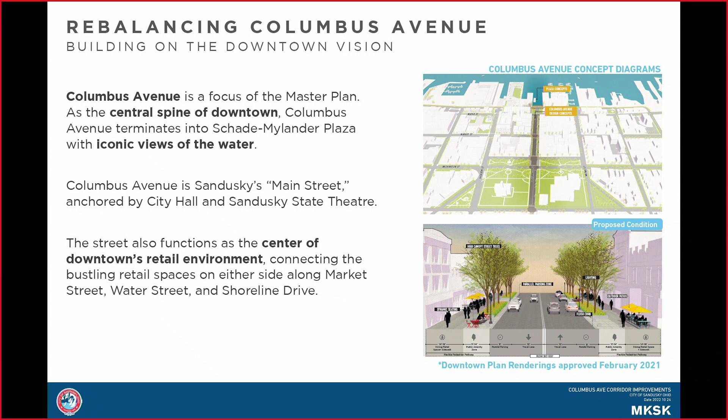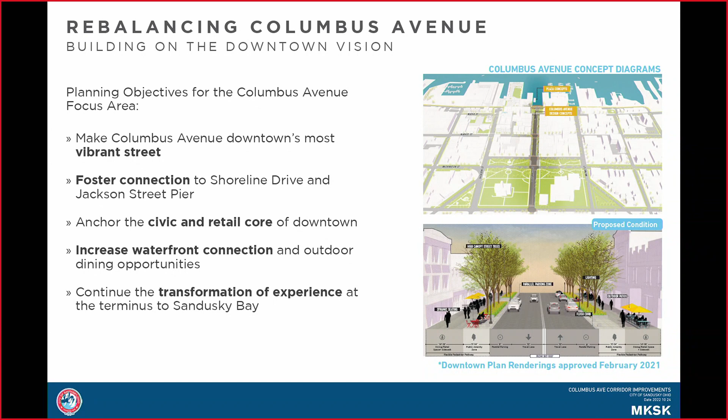We were tasked with planning objectives that built upon the vision for the downtown of really envisioning this as a vibrant downtown street, fostering connection to Shoreline Drive and Jackson Street Pier, anchoring those civic and retail establishments that I mentioned, increasing waterfront connection, and continuing that transformative experience of, as you're entering Sandusky, really taking in all of the elements that it has to offer.

We have been involved throughout, from the beginning, through all of the stages of the engagement phase, which has lasted about 6 months. As you can see here, it has been robust and varied.

We started with a site tour and an open house where we had a visual preference survey, as well as some example projects from around the region.

Stakeholder focus group sessions where we had discussions about how the street could best function for the downtown retailers, the dining establishments, the festivals, and the events coordinators.

Then taking all of that information, we brought it into the conceptual plan and started to bake some of those details into the schematic plan.

We followed that up with one-on-one project discussion sessions with many of the stakeholders, 2 outreach events where we talked with locals and handed out info cards for the survey, a really great engagement in the online survey with 434 respondents, and 17 follow-up sessions.

All of that was part of a cyclical process where we constantly built upon the details, the design, and the cross-section, and made changes based on all of those discussions. It's been a really engaging and in-depth discussion with the city throughout the process.

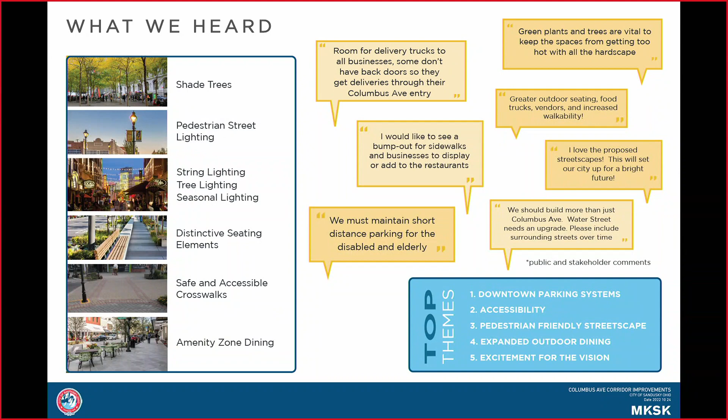As part of those engagement sessions, we also shared and studied example cross-sections, not only across the nation but also regionally and right here in the state, to see how they function, what has been successful, and what has been implemented to really bring people back to downtown.

I'll go quickly through the street-by-street, block-by-block cross-section. Here you can see the overall project boundary, Schade-Mylander Plaza to Adams Street, and as you can see from the rendering, it breaks down into 2 character zones: the active retail and dining downtown core as you get towards the water.

And then as you make your way up towards the parks and towards the south with some of the civic anchors, it starts to evolve into more of a tree-lined parkway.

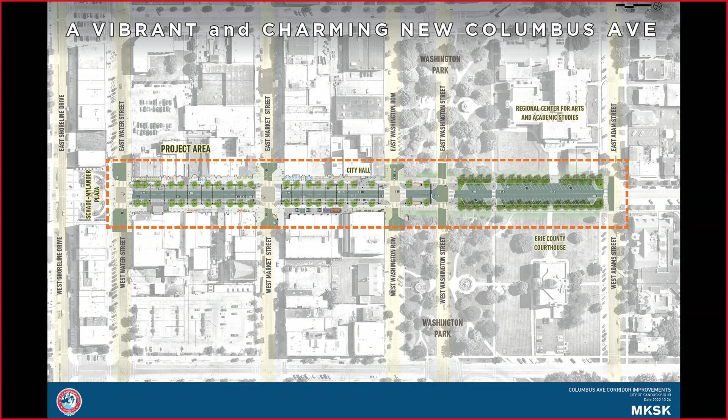Getting into the plans, you can see here the cross-section. We'll also show this in perspective, but the breakdown is 2 drive lanes, 2 parallel parking lanes, an amenity zone, a dedicated strolling or sidewalk zone, and then a dedicated dining and retail zone.

All of this responding to what we heard throughout our engagement sessions. You can also see, moving 1 block up to Market Street and Washington Row, the different treatments of the crosswalks.

These have created really generous pedestrian zones that feel safe for crossing. The bump-outs help neck down the crossing time. Right now it takes roughly 10 seconds to get across the street, and this will really reduce that and create a safer experience for people downtown.

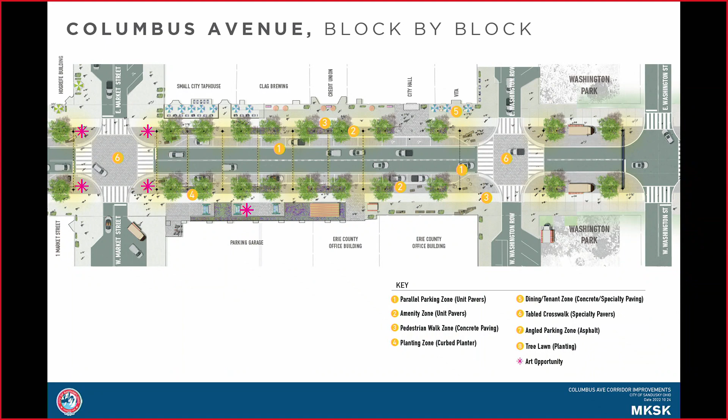And then, as I mentioned, the southernmost block transitions to more of the civic space, with a tree lawn and parking cross-section with the 2 lanes, everything aligned and on center throughout the cross-section.

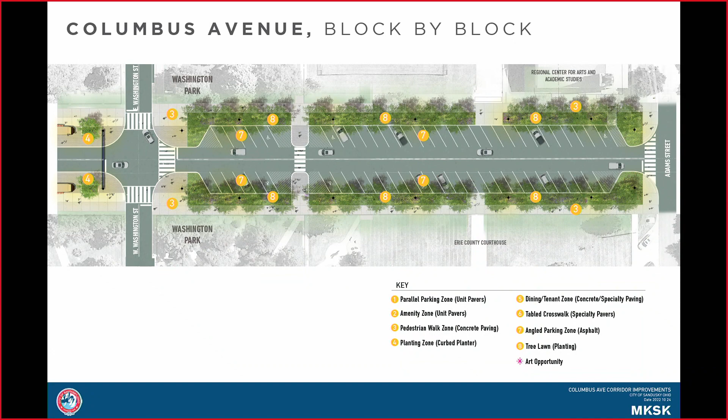To give you a better idea of how this is breaking down, we have about a 12-foot dedicated dining and retail space available for any first floor tenants to spill out into, creating their front door experience without impeding the 8-foot sidewalk clear zone, which maintains a place for pedestrians, plus a 9.5-foot public amenity zone for additional activation and space for shade trees that people were interested in.

Then within the street cross-section, you see 11-foot drive lanes and parallel parking at 9 feet on either side.

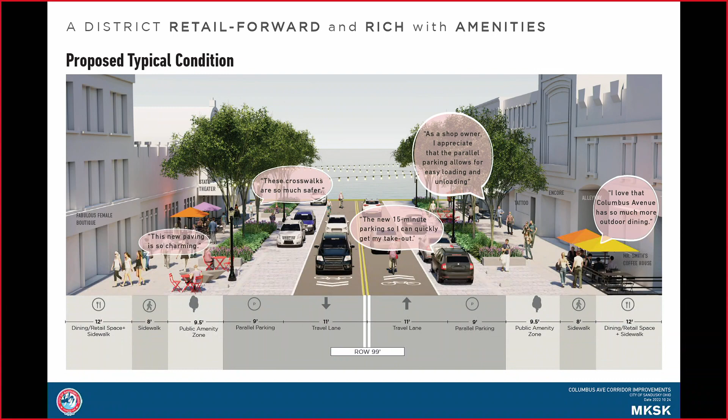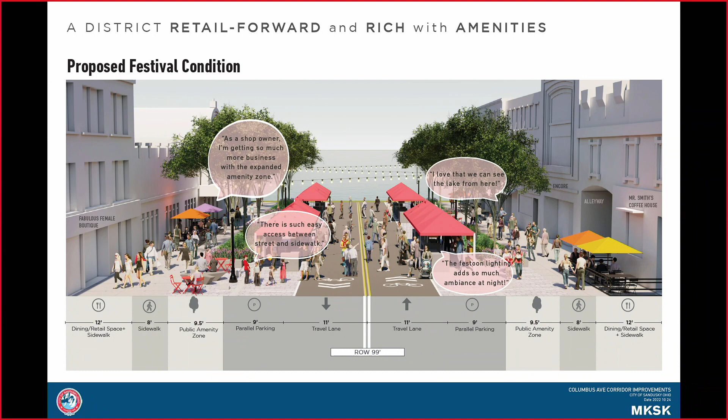This is our typical section and the primary condition of the streetscape, but we also studied how to make it function during an event or shutdown for a parade or festival. Looking at the market tents, what we heard a lot from the dining and retail establishments is that they didn't want to be blocked by festivals—they want to feel like they're part of the festival. So this cross-section brings the festival into the street while allowing permeability and comfortable flow in between, achieved through the cadence of tree plantings and low-profile curb detailing so people can move back and forth easily, and because of the dedicated dining space, retail and dining establishments can really feel like they're part of the festival.

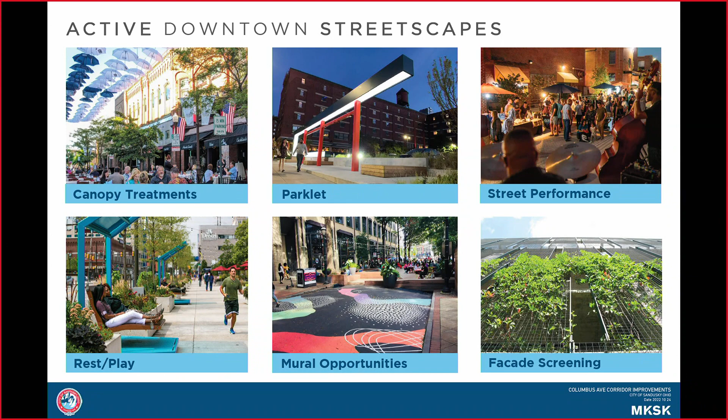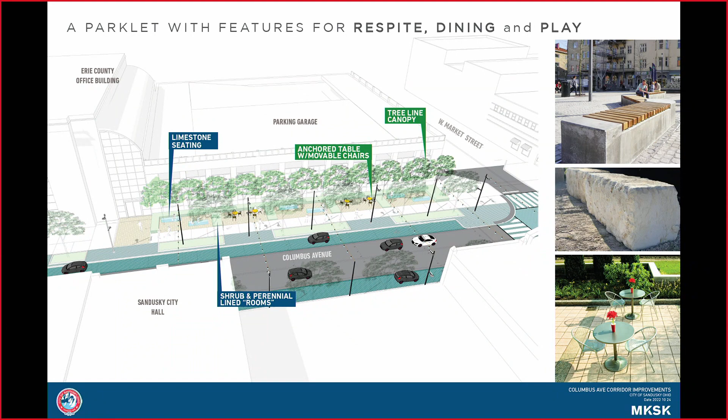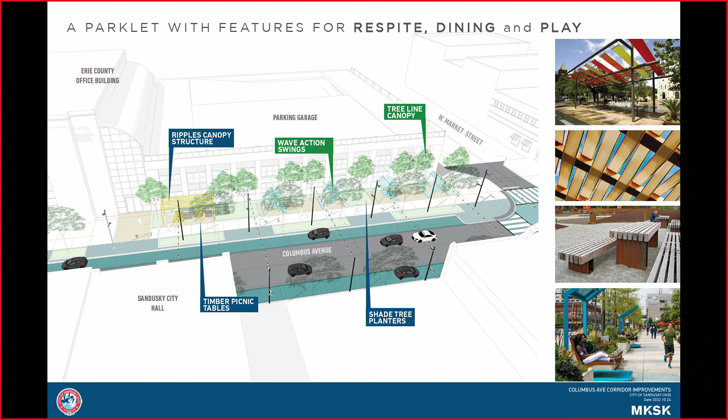This hopefully will build into new and bigger things for downtown. We're also looking at other opportunities to activate the streetscape, through partnerships with the Arts Commission to find places to dedicate for art, and we've started studying the area in front of the parking garage, which is currently a quiet, dead, underutilized space, to create opportunities for a parklet with details we heard about in the visual preference survey. We're showing two options: one more of a seating and room design with outdoor bistro tables, and a secondary option still being discussed, incorporating playful elements like swings, a shade structure, and community tables, all in an effort to create spaces for people and an elevated public realm.

Now getting into the before and after for how parking is redistributed throughout this corridor: the existing vehicle count today is 115 spaces with 11 accessible spaces, shown in orange and yellow. It's angled throughout most of the corridor, with parallel parking up in the civic zone in front of the school. Our proposed current parking strategy is for 108 spaces distributed throughout the corridor, redistributing the totals and adding more spaces in front of the courthouse—something we heard from the courthouse—and in front of the school, while also redistributing accessible spaces so they're more balanced, keeping the same total number but placing them more intentionally near spaces that may regularly need accessible parking, like City Hall, the State Theater, and the courthouse.

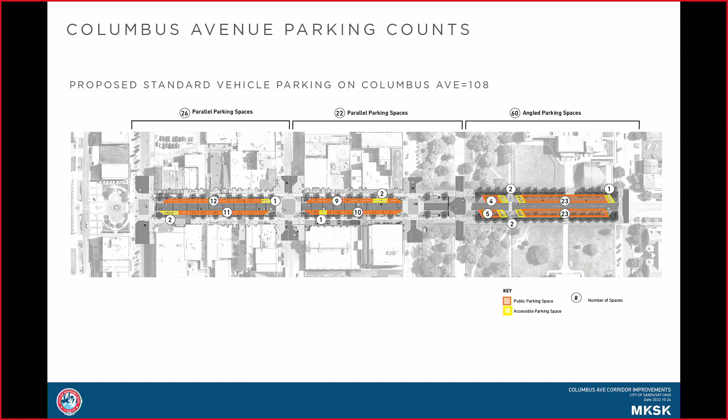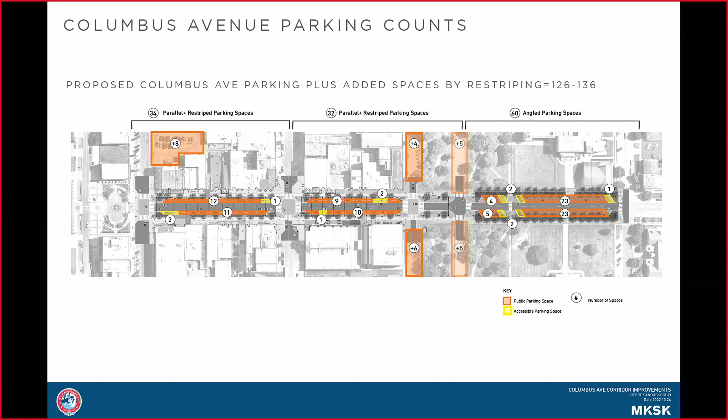With the current design plus the restriping initiatives by the city, we're projected to have about 126 to 136 spaces at completion within the same block district, adding restriping and increasing efficiencies on adjacent streets, as well as looking at parallel parking on Washington.

As we've been listening and working through our engagement strategy, we've been looking at this entire district as a whole—studying the parking as it exists throughout the district to make sure we have the right balance, improving the conversation about where parking is most needed, how to manage it, and how to better sign the parking garages so they're understood as a free parking amenity downtown, along with added benefits like increased accessibility, safe crosswalks, new lighting, and rebalancing the entire district so it's safe for both cars and pedestrians.

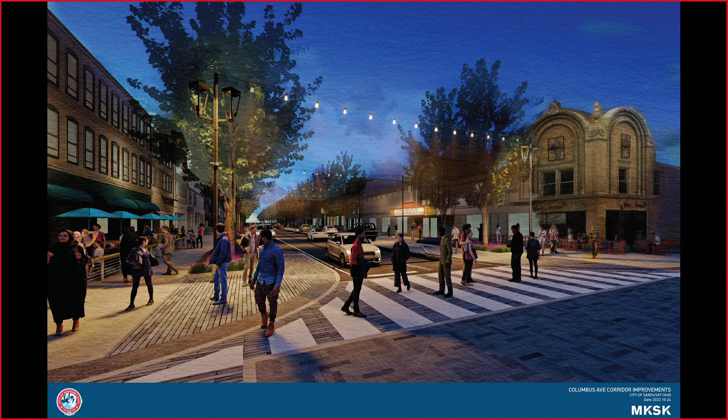We asked the team to put the whole downtown parking slide into this—it's not in their scope to think about, but we have a lot of conversations about accessible parking and how to get to all the great things happening in Sandusky. We do look at downtown parking as a system; we want it to be a park-once kind of place where it feels comfortable to park and walk a few blocks for those of us who are able-bodied and can walk a few blocks.

And for folks that need a space closer, there are accessible spaces that are closer. We are looking at downtown parking as a system—how you find it, where it's located, where there are opportunities to add more spaces as needed—wanting to make sure we're looking at that larger picture, even though we're just talking about this 3-block concept for Columbus Avenue tonight.

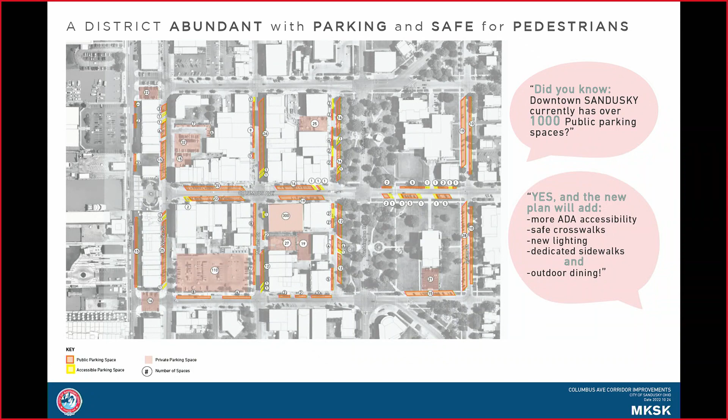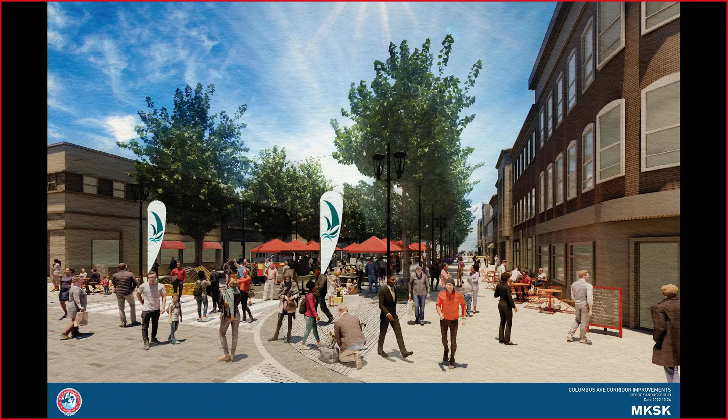Here's another view looking back towards the water of a market condition. The road would be closed at this time—you'd have plenty of time, and you can see there's still lots of clear space between where the festival tents exist and the front doors of the existing establishments.

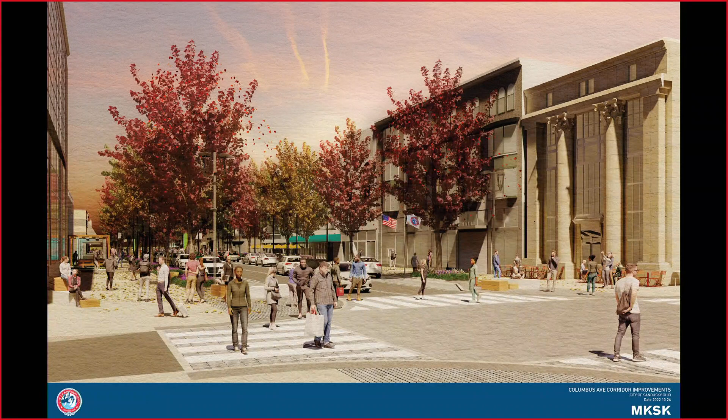So there's that nice porosity between the spaces and lots of opportunity for activity and safe crossing throughout the space. Looking back from the park towards Vita and City Hall, you can see a glimpse of that parklet towards the left—some seating and opportunities for bistro tables in that spill-out zone, plus some activation along the streetscape.

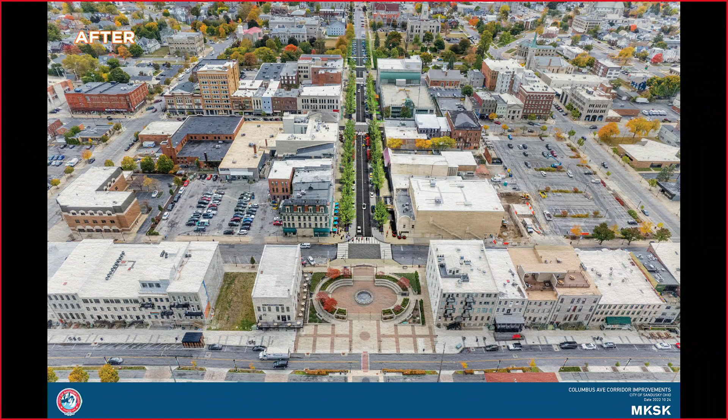This is a current aerial view looking down Columbus Ave from the water. And then the proposed condition, with the extended pedestrian realm, the more organized and symmetrical streetscape design that lines the entire corridor, and that transition from the park area and civic zone down into the more activated retail zone.

The goals and outcomes we're looking to achieve through this design: stronger retail, business, and civic corridors, increased public space, expanded outdoor dining, improved safety, accessibility, and comfort, and all the stuff that happens underground and behind the scenes but is great to take advantage of during these projects—updated water, storm, and utility infrastructure. So really taking advantage of these larger infrastructure projects to make corrections and improvements where needed.

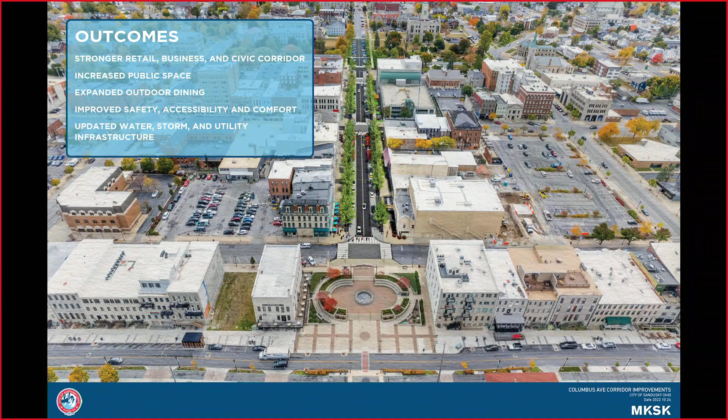We didn't have a good cross-section, but the crown is also something we're addressing with this cross-section. Our final next steps: Phase 2 design will occur this winter with submissions in 2023, Phase 3 in the spring, project bidding over the summer, and construction commencing in the fall.

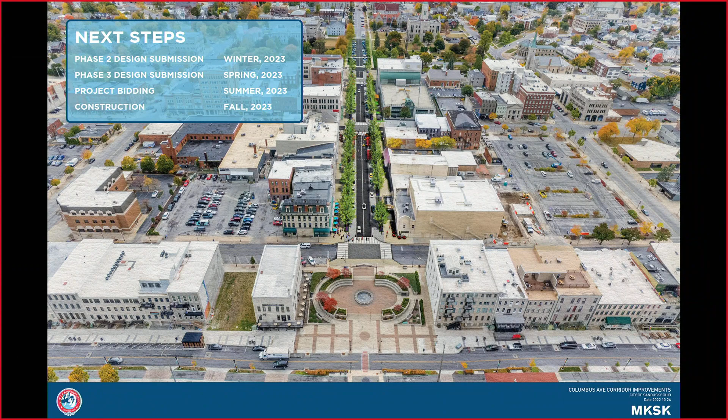And with that, I will take—that's the end. Comments or questions, commissioners?

I have one, it's kind of a softball for you, hopefully, but I love the idea of the trees. Am I going to have to wait 25 years to see that canopy?

No, actually, that's something we take a lot of pride in the specification and care of. The amount of space dedicated will help these trees grow faster in an urban environment. We specify 3-inch caliper or above for urban environments so they start big and the canopy starts high, so it's not blocking the signs in the retail environments. We're also selecting the correct species for the corridor—something robust, quick growing, and not the ornamental scale size out there today. It's going to be a shade tree variety.

So I can look forward to being somewhat less than 100 when that happens. Yes, yes. Thank you, that's heartwarming.

Mr. Chairman, additional comments? Mr. Murray? All right, I'll just say I think this builds very nicely on what we've already been doing. It certainly was not something that I thought of—it was not on my mind that we needed to redevelop Columbus Ave. But as I looked at it and thought about it, and I've seen the growth that's occurred in the area, it makes a great deal of sense to me the way you've presented it—that we're connecting a couple of places and making sure that growth continues out into the community. I think that's really one of the big things we need to do going forward: make sure this economic engine we have in the middle of downtown Sandusky, which generates so much commercial activity, continues to radiate out and benefits the community as a whole.

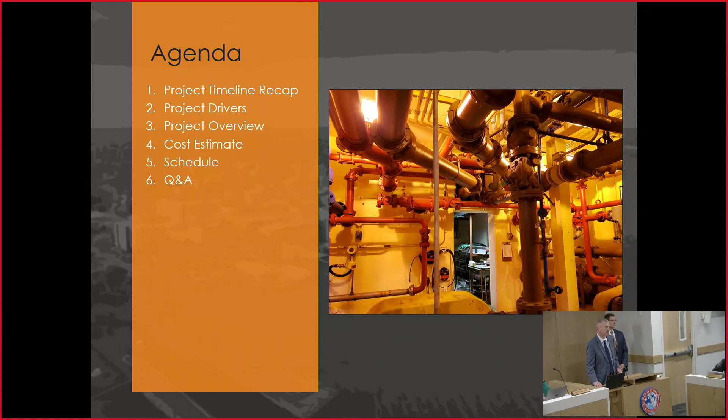I'm going to go through a couple slides, come back up in a little bit to take some slides towards the end, but Vito Cimino is the project manager with Stantec, and he'll be doing the bulk of the presentation today.

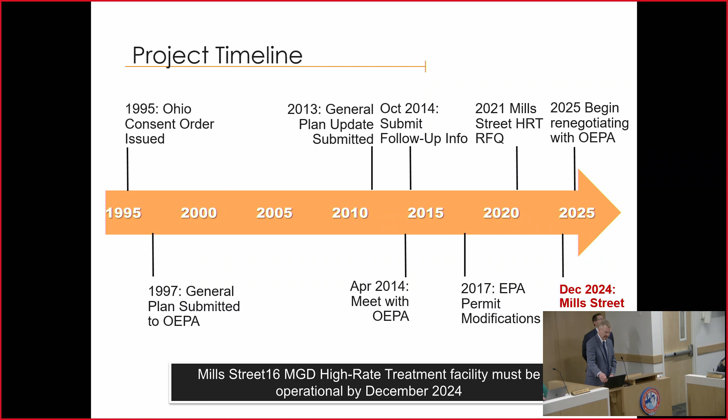I want to get back to where we were several years ago and real quickly show the timeline we went through. Back in 2014 was when we renegotiated with Ohio EPA for our general plan. Before that, we had done several projects to expand the wastewater treatment plant, add capacity, and do some sewer separation projects, and some very limited projects out in our sewer system.

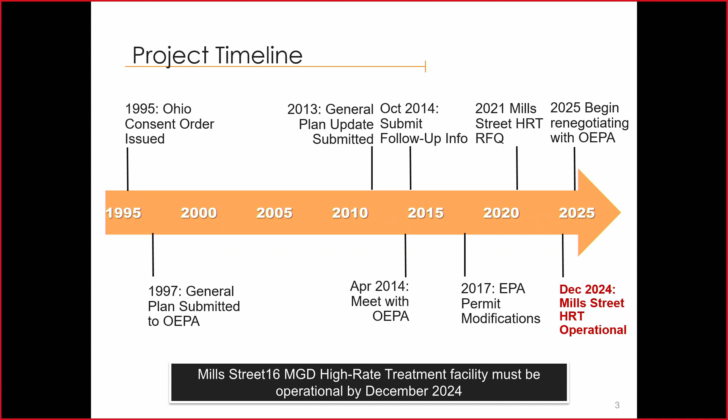Since the 2014 renegotiation, we have done 4 main projects required by EPA, the last one being this Mills Street High Rate Treatment Project. We are required to go back to EPA around the 25, 26 timeframe to start negotiations again, and before that, these are the 5 projects listed in our NPDES permit.

As you can see, these projects don't take a short period of time, and we've spent quite a bit of money doing them, which brings up a question asked earlier about the rates and taking out loans. A lot of these projects have been pushed back for many years.

A lot of what we're doing out in the sewer system—before 2013, we hadn't really addressed any of our lift stations throughout the city for 30 years. So over the last 7, 8 years, we've upgraded or improved or done work on every one of our lift stations. Our last one is unfortunately the Columbus Avenue lift station, which Norfolk Southern will now be doing some work on.

We're moving back. We've done a lot of sewer projects, sewer separation projects, and those types of things. We work closely with the finance department to make sure that when we're doing a project like the Mills Street High Rate Treatment Project, or the Perkins Avenue project, or MEGS, or any of these, that once we reach a certain threshold, we're being fiscally responsible. We might have to push projects back or move them forward based on where our funding sources lie. And now I'll turn it over to Vito.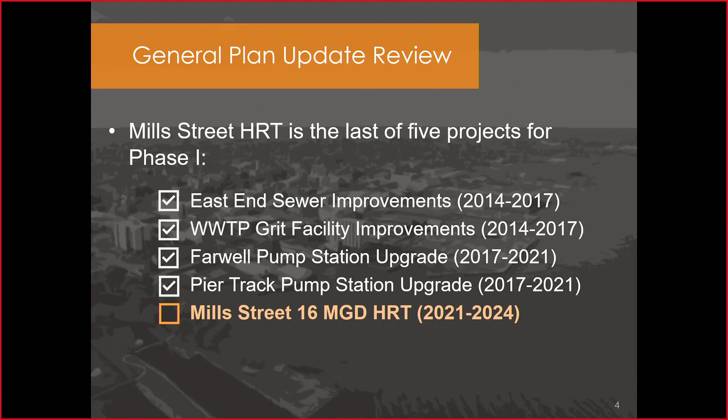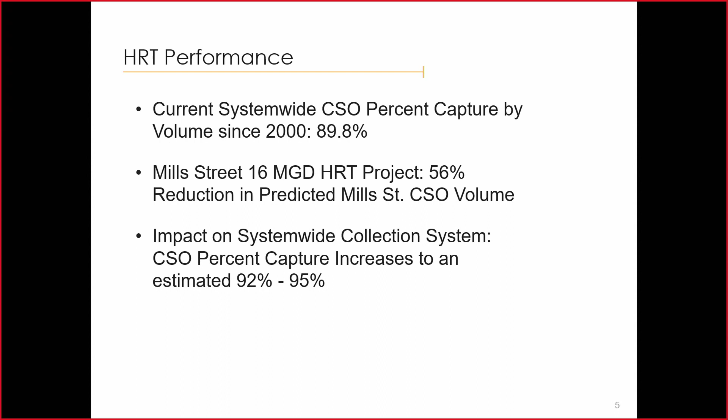So a couple stats on the performance this project will provide: your current system-wide CSO, combined sewer overflow, percent capture for the system since 2000 has been about 89.8%. The current project, the Mills Street 16 million gallon per day high rate treatment project, will as predicted remove 56% of the CSO predicted volume to the Sandusky Bay, which increases the overall capture for the collection system to roughly between 92 and 95%. So definitely a benefit to your system.

When we did our analysis and pre-design, we discovered that if we just pull flow from the actual main interceptor providing flow to the plant, using systems already in place - screening, influent pumping, aerated grit - two things can happen. First, you satisfy the requirements of the project, and second, you also provide residual benefit to the wastewater treatment plant itself, for aging equipment and for limited capacity.

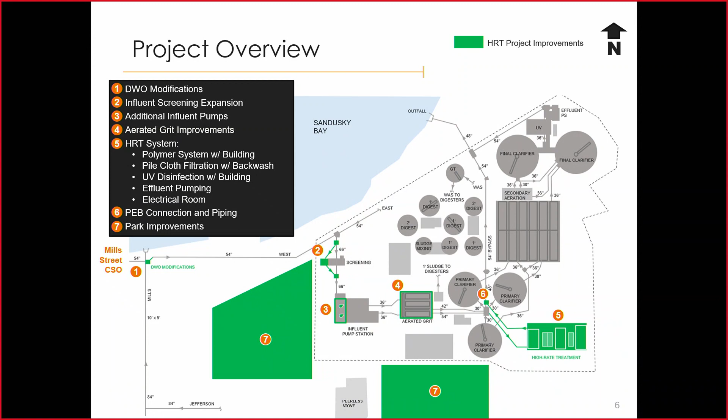So I'll walk through each one of those to give you a little more detail, without boring you with thousands of technical details, hopefully.

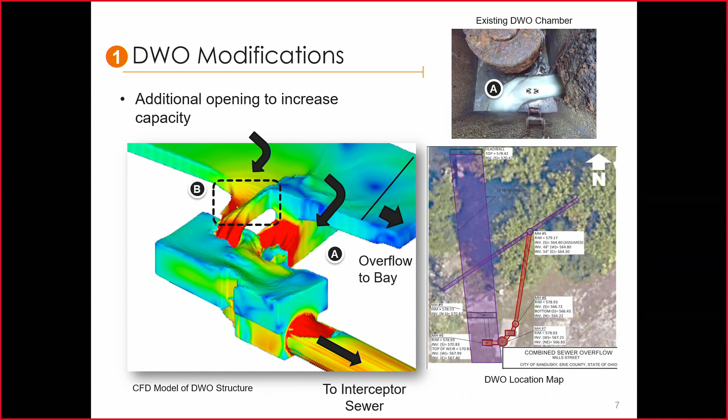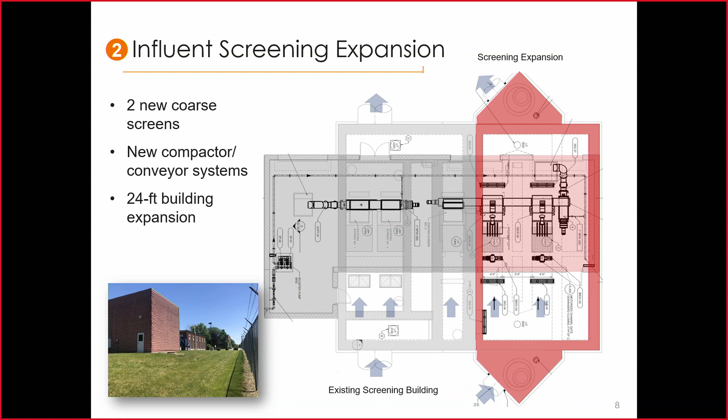For item number 2, it's pretty self-explanatory. This is a plan view of the screening, existing influent screens at the plant. The blue arrows indicate the direction of flow. On the left in gray are the 3 existing screens, and we need 2 additional ones: one for additional capacity, and a second to satisfy EPA requirements for fully redundant influent screening systems. This portion will include new compactors and conveyor systems and a 24-foot expansion of the building. The photo in the bottom left is the western face of the screening building, which will be extended out 24 feet.

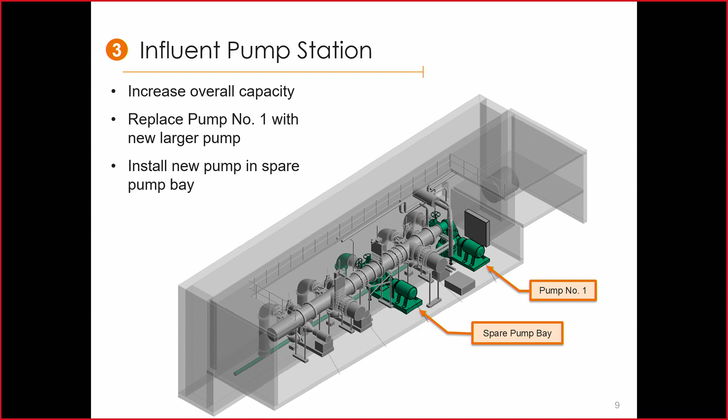The influent pump station itself, here's a 3D model of that. The 2 green spots are basically 2 new pumps being placed—one where a spare pump bay was already there from the original construction of the influent pump station, and pump number 1 is being upsized with a larger unit. So we're basically taking 2 existing spots, putting in new equipment, and that gives us the additional capacity we need for the additional 16 million gallons per day.

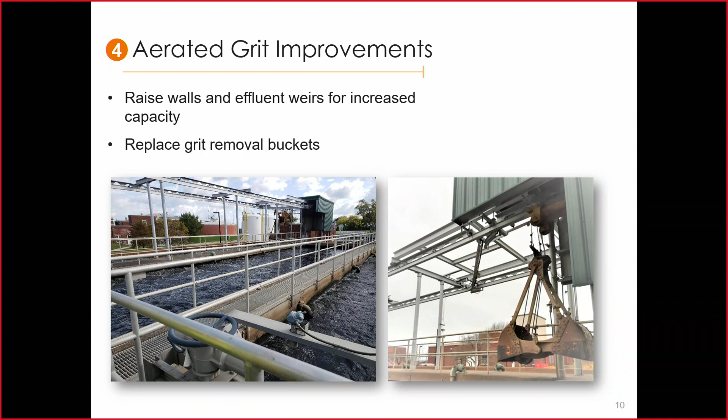For aerated grit, a couple photographs here. As I mentioned, there's plenty of process capacity but limited hydraulic capacity. By raising the walls approximately 3.5 feet, including the effluent weirs, we're able to achieve that additional hydraulic capacity. You can see the clamshell bucket used to remove grit during dry weather—those are aged pieces of equipment at the end of their useful life, so we're replacing those as well.

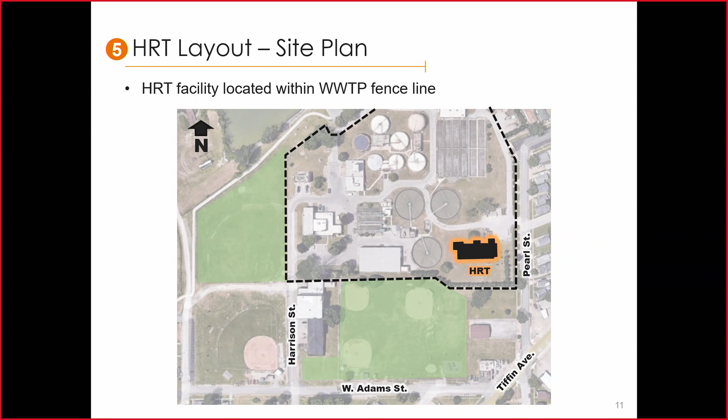Moving on to high rate treatment. There's a lot of pieces and parts moving with the HRT system. First, I want to emphasize this is roughly to scale, where the black outline with the orange halo is the proposed HRT facility. It fits completely within the fence line of the wastewater treatment plant itself.

When we get into the system itself, this is a plan view showing the various components. As flow enters the HRT, there's an option for additional chemical dosing if we need it in the future. The primary components are pile cloth filters—basically a series of discs, 10 feet in diameter, wrapped in pile cloth, like fancy carpet, that removes suspended solids from the flow, and the part that enters the center of the filters comes out as cleaner water.

It goes through 3 filters, and then the flow passes over to the purple boxes on the right for UV disinfection. We selected this equipment because the plant already has a UV system for disinfection, so they're used to the technology and maintenance required.

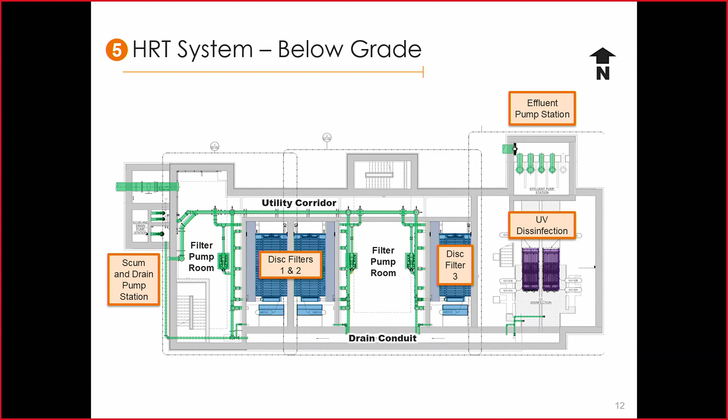From there, it has to be lifted with an effluent pumping station and out to an existing conduit on site. So here's some below grade facilities—this is a 3D model of those same facilities. You can see a lot going on as far as the sizing, the various compartments, pump rooms, staircases and so forth associated with this design.

We took advantage in some cases where the footprint occupies the space for this facility. So instead of carving out little angles or making an oblong shape for the excavation—because we have to excavate through rock in this area—we took advantage of those spaces to expand to the full rectangle, maybe adding a drain conduit or a corridor for electrical conduit routing or other piping, so staff has easy access to it as opposed to it being buried underground.

Here's an example of the pile cloth filters in the upper right.

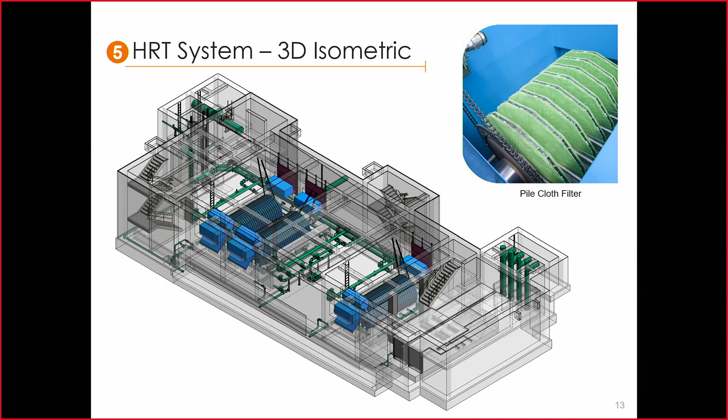Systems are at grade, mainly flush with grade. There are 3 superstructures, 3 above-grade buildings: first the mechanical room on the left, then the electrical room with a stairwell in the center, and then the UV building itself on the right.

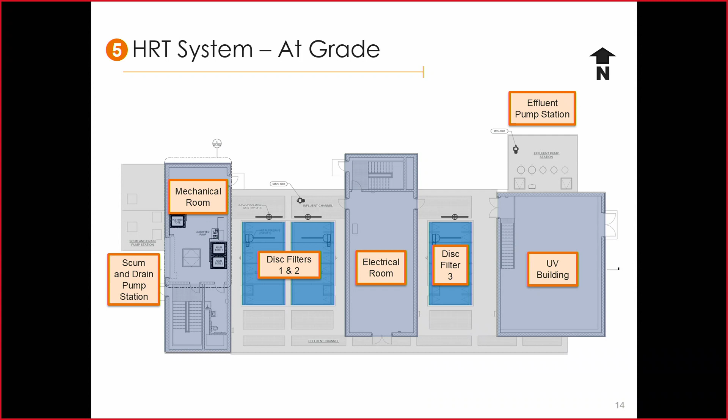Each of the 3 disc filters is going to be covered—you can see on the next slide—with an angled cover that gives staff access for visual confirmation that the system is functioning properly, but also because the pile cloth is subject to damage from ultraviolet rays, so we have to keep it covered from sunlight.

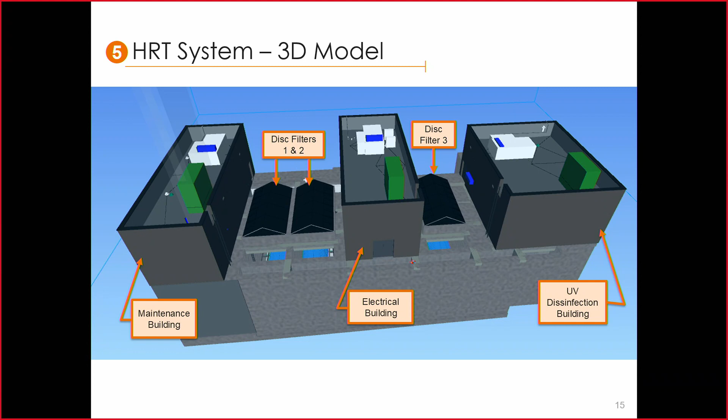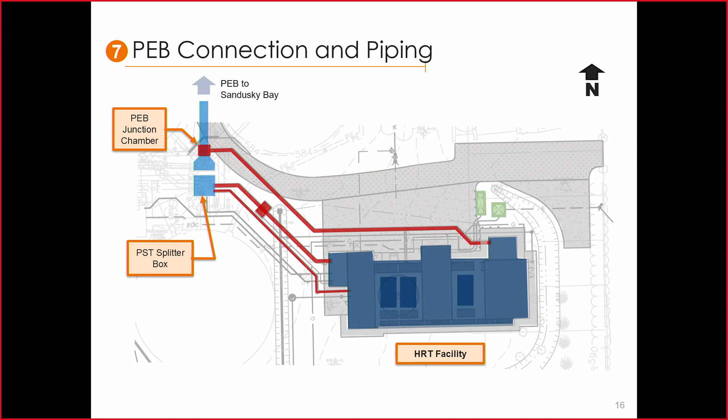Yes, so the next section of the project is we wanted to make sure that we did not impact the park in a negative manner. Our main focus with the park was to acquire the property so that we could enhance the park, make the park better as part of this project, not to take anything away from it. So we've worked with the Youth Baseball League, we've worked with the Parks and Rec Department, planning to make sure that we are looking at this properly.

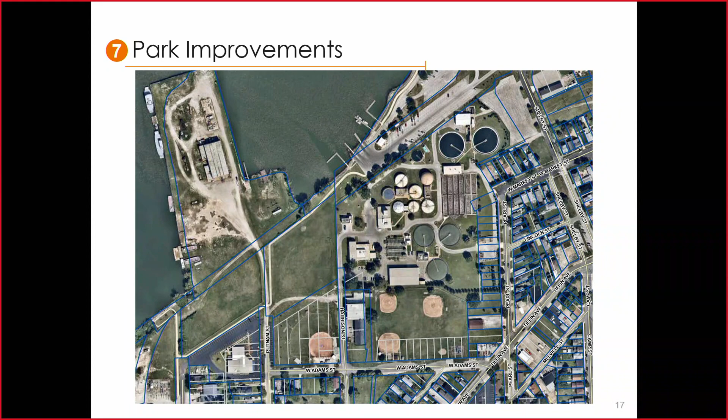Our hope was to not necessarily have Sprout Park that has a beautiful vista of the wastewater treatment plant. Rather, we could move those two ball fields closer to the bike path, closer to Sandusky Bay Pathway, and have that more linear path with the beautiful views going directly north. And you'd still have the two ball fields.

I believe the two ball fields on the western side of Sprout Park are planning to stay. So those two fields that I had previously talked about would be this field here, and then there's a little grass T-ball field here. We need this area for our laydown area and for our yard for this project. So we're going to have a driveway coming through here and a driveway coming through here to gain access to the site so that we're not disturbing these ball fields over here.

That means that we have to remove this playground and we have to remove this. We've been working with these two fields, working with the Parks and Rec Department to see if they can procure more equipment for a new playground. As part of our contract, we'll install that playground, but we're not going to buy new equipment with the sewer fund, obviously. But we do need to relocate these two fields.

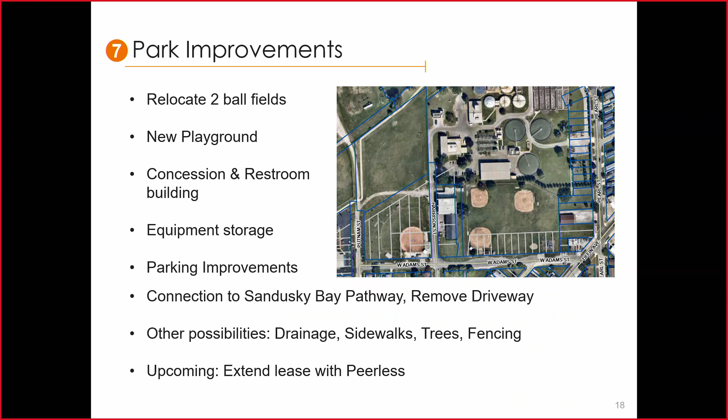In addition to that, we're talking about a new concession and restroom combined building. That concession building is not in good shape. There's a lot of old sheds and things like that out there that we've begun to take down. We're looking to do parking improvements and even create some access to the Sandusky Bay Pathway.

You can see here what we'd like to do. There's a lot of children that will get off the bike path from the east and come right through this field to get to where they're playing ball that night. We'd like to create this walkway through here and even another one so the children from the west can get over to their fields as well.

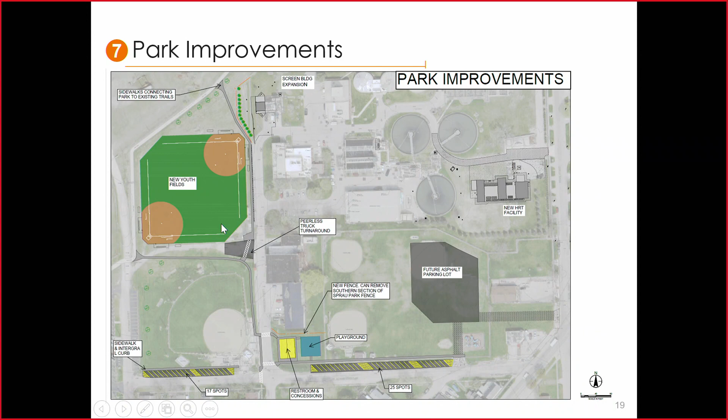So some specifics relative to schedule. We issued final design documents to the city, signed and sealed this past Friday, October 21st. We're looking to advertise for bid upon approval by the first week of November, with the bid opening scheduled for the first or second week of December. We're in the process of applying for funding through the state for the loan for this project, anticipated approval by January, and then an anticipated contract notice to proceed by February 1st would be ideal.

I say ideal because this job is EPA mandated and needs to be completed with construction by December of 2024. So substantial completion we're estimating by October of 2024, where beneficial use is handed over to the owner for use. And then we meet the permit requirement by December 1st, 2024. There's some extension of work, maybe some seeding and so forth, beyond the actual technical function of the project to help restore the site, probably through the spring of 2025.

And the engineer's estimate for the project is approximately $33.5 million.

So with that, we can open for any questions. Comments or questions, Mr. Commissioner?

Chairman, Commissioner Bunting? I know the EPA's always chasing, it's like me trying to chase my dog down the street, okay? So what's the forecast for the next 3, 4, 5 years? We get this completed by 2025. Is there something coming? Are you aware of anything that might be changing, maybe as far as UV, the tubes that we're using now? Is there something coming down the road that's going to be very costly?